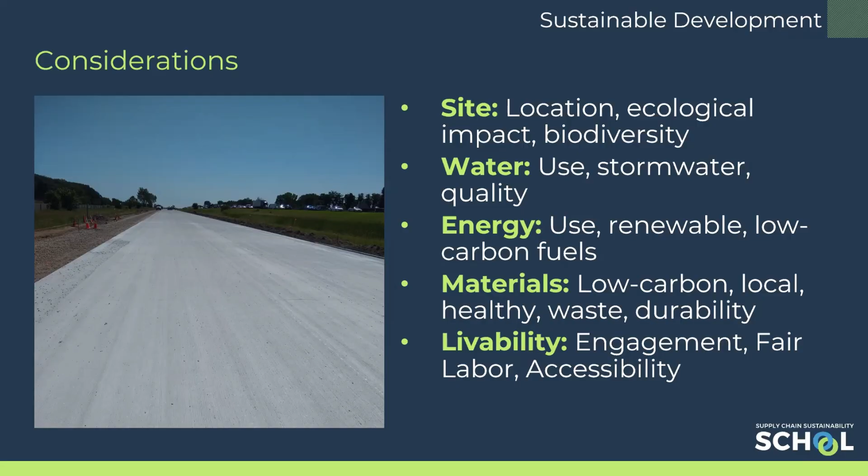So while many of the sustainable infrastructure considerations are variable by project site, this is very site specific. The one core element that's not is materials. So when we think of roads, we think of asphalt, concrete, steel, maybe shaped rocks and aggregates. And this webinar is going to focus on those material choices because of their large environmental impact. Next slide.

So you've probably seen this before, that the built environment is responsible for 39% of global energy use and carbon emissions. A subset of that 39% of global emissions is the 11%, which is from the development of construction materials and products. And when we look at infrastructure-related materials, that's primarily concrete, steel, and asphalt, that accounts for 8% of global emissions. So it's a pretty large percentage associated with these three materials.

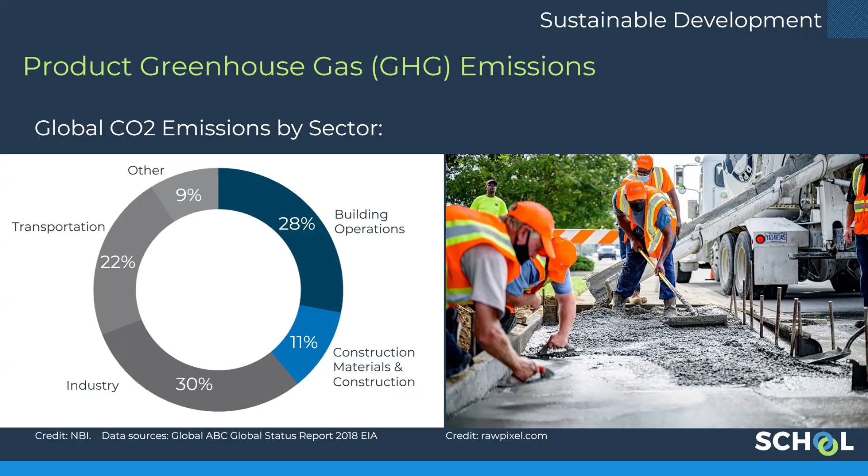The building sector has really been focused on reducing energy consumption during the operations phase, so their energy use. And there's been more focus on low embodied carbon product choices to reduce their full life cycle emissions. And now state departments of transportation are also developing policies and programs that are considering the materials in roads and bridge projects to reduce their GHG emissions associated with procurement as well. Next slide.

So there may be repair or maintenance during the use phase. So think filling potholes, for example. At the product end of life, there may be an effort to remove and transport the product to dispose or recycle it, like recycled pavement. Next slide.

Low carbon infrastructure policies and programs are being developed by public entities to meet their greenhouse gas reduction goals. And we're also seeing some private organizations develop requirements to meet corporate net zero goals. So all of these different groups are seeking qualified professionals who can deliver low carbon products and projects. Next slide.

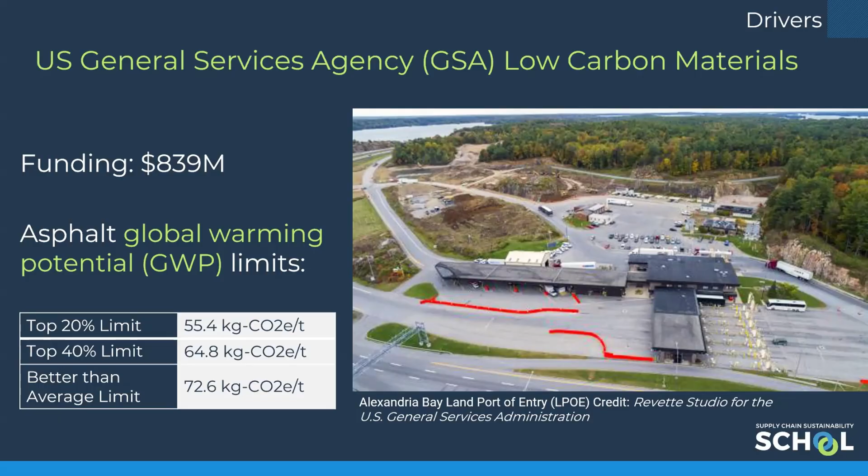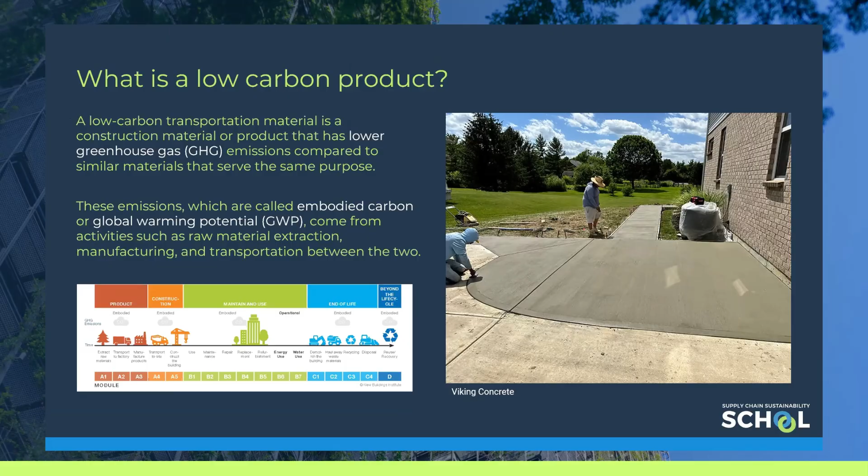So how do we deliver low carbon products and comply with these different policies and programs? Let's just jump right in. Next slide. First, we need to know what low carbon actually means. Low carbon is kind of relative to each product, and in some cases, it can change by location. So when we consider our life cycle stages, that chart on the bottom left, we also want to consider what stage. Are we looking at an individual concrete mix? Or are we looking at a full new bridge or tunnel project? In general, one batch of concrete is considered low carbon when its carbon content is 20% lower than a regional average. But that's really dependent on how a program defines it. It can be defined in a lot of different ways. Next slide.

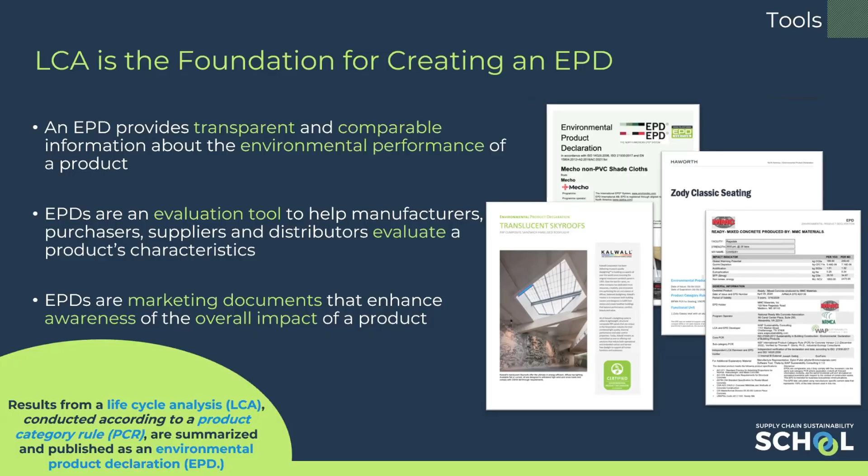We measure the embodied carbon or the global warming potential, interchangeable, of products through something called a life cycle analysis. The life cycle analysis is the foundation for creating the environmental product declaration, the EPD, that specific tool that we're using for compliance. And since the details in the EPD are specific to a product, the product manufacturer is the one that's developing that document, and they're available from some databases or obtained directly from the manufacturer. There's standards and rules around the development of LCAs and EPDs. And of course, again, the Supply Chain School has your back there. They have a webinar on this topic for more information. Next slide.

So the LCA provides some proprietary information about the product, where the EPD is kind of that public-facing document that presents the data consistently, and the data can be compared within the same product class. So if you're looking at asphalt, you can compare it to asphalt, but you don't necessarily want to compare asphalt and concrete since they're different types of products. Next slide.

EPDs also provide information about the environmental attributes of a product. It's more than just the global warming potential. So most of these DOT programs are asking for the global warming potential of a product. But there's a lot more information in the LCA and the EPD, like the ozone depletion potential, the water use, acidification, eutrophication. The LCAs provide product manufacturers really helpful information to improve the overall environmental performance of their products. So while we're just looking at one thing, just know that these are really complex and have a variety of data in them. Next slide.

Low carbon material programs often focus on the most commonly used products and those that are relatively higher in embodied carbon and have lower carbon alternates. So in transportation, go to the next slide, we're looking at concrete, asphalt, and steel. We'll look at each of these products and understand kind of high-level opportunities to reduce the global warming potential of each of the products. Next slide.

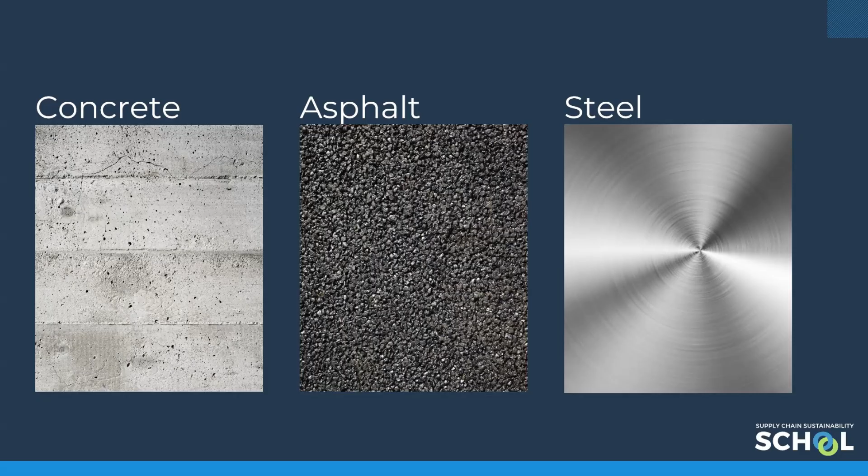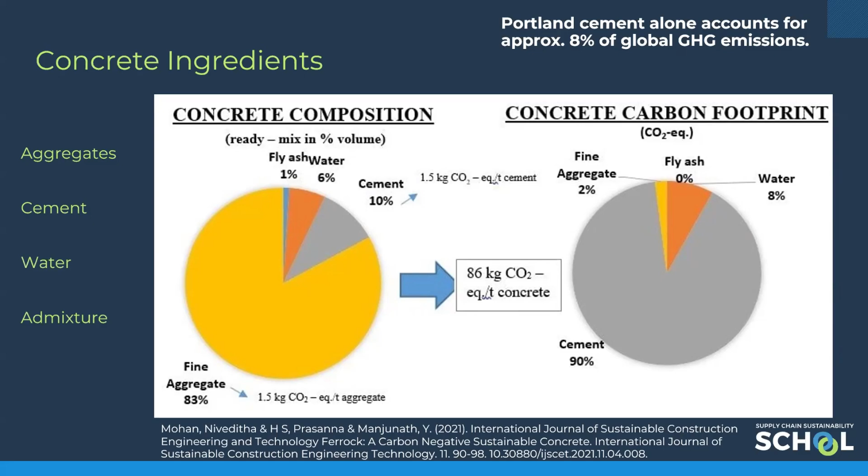So first we have concrete. What's concrete made of? It's a really simple and very complex product. Concrete consists mainly of aggregates by volume, but also contains cement and/or supplementary cementitious materials, water, and admixtures. The pie chart on the right shows that the majority of the concrete emissions comes from cement production alone, specifically the clinker manufacturing. It's around 90 to 95% of the product's global warming potential. And the clinker is produced by heating limestone, which is a rock, to really extreme temperatures, cooling it down, and then crushing it. So it's a very energy intensive process. So when we talk about reducing emissions from concrete, it's often finding ways to reduce the cement content while meeting the same performance characteristics. Next slide.

And aggregates, which are 80% of the concrete by volume, come from different types of rock quarries, but not all rock is the same. It's a very heavy product, so you're likely using something that's more local. And if the aggregate's of lower quality, your local concrete might require more cement to reach specific strength requirements, or maybe you're actually importing higher quality aggregate so that you have stronger aggregate and could use less cement. The more the product needs to travel, the more likely you're increasing the energy to make that product. Next slide.

So there's several opportunities to reduce the emissions associated with creating concrete. It's a really flexible and unique product in that each mix can be different. But because cement dominates the concrete emissions, most decarbonization efforts are focusing on reducing the cement and clinker content with supplementary cementitious materials, or lowering the emissions from cement manufacturing through plant energy efficiency or lower carbon fuels. And some of those efforts take years or decades to move those plant efficiencies forward.

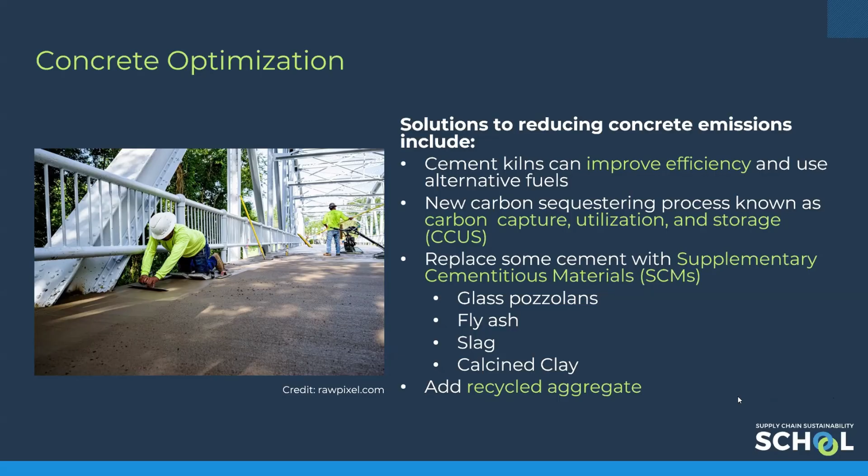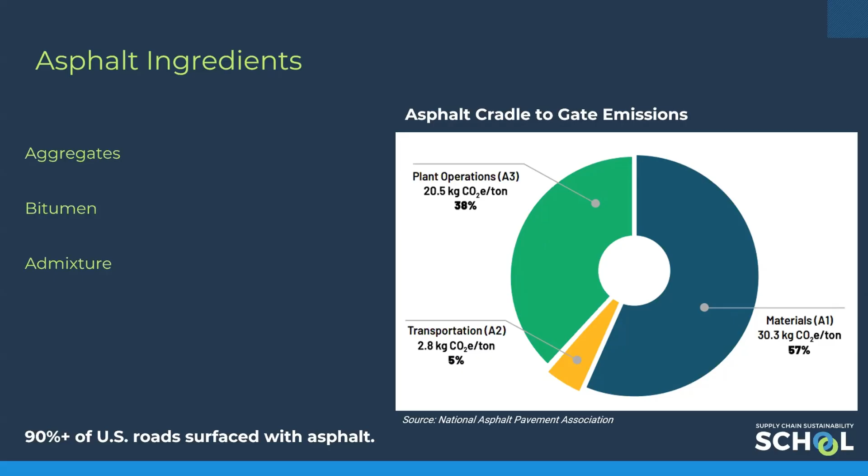Next, we have asphalt. Asphalt, similar to concrete, we're looking at 90 to 95% crushed stone, sand, and aggregate by volume. And then we have bitumen, which is a byproduct of crude oil refining, and it's really the glue that holds all the rocks together. In many cases, the extraction, transportation, and manufacturing of the raw materials accounts for about 50% of the asphalt emissions. And the asphalt plant itself, that burner fuel, is about 40% of the emissions. So where with concrete all of the emissions were pretty much in the products themselves, with asphalt, the actual heating of the fuel is where we're seeing more emissions. Next slide.

So there's several options to reduce the embodied carbon of asphalt. Increasing the amount of recycled asphalt pavement is number one. So if asphalt mixtures were to include 1% more reclaimed asphalt pavement, it would be the equivalent of taking 30,000 cars off the road. So just 1% makes a big difference. Asphalt plant fuel is the second largest carbon impact in asphalt. So reducing the asphalt mixture temperature will reduce the amount of fuel that we're using. And many departments of transportation are experimenting with warm mix asphalt over hot mix asphalt.

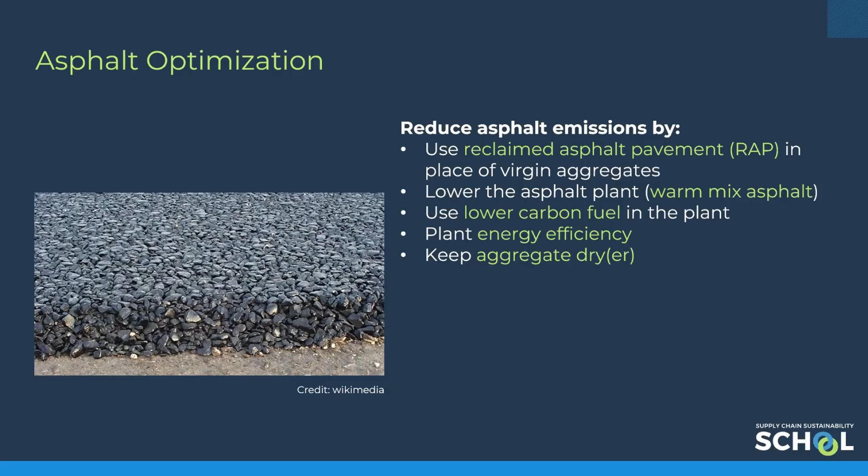So steel is our last one. Steel is 98% iron. It's also one of the most mined materials in the world by volume, but it's also a highly recycled product. Steel is made with either blast and basic oxygen furnaces or electric arc furnaces. Basic oxygen furnaces really depend on more virgin materials and are more energy intensive than the steel that comes from electric arc furnaces. And in the US, 70% of steel is produced with electric arc furnaces, which use significantly less energy and more recycled scrap steel.

So steel covers a lot of categories when we're looking at low carbon transportation materials. It can include structural steel shapes, welded wire mesh, plate, rebar, and a lot more. So it's not just the big heavy steel. Next slide.

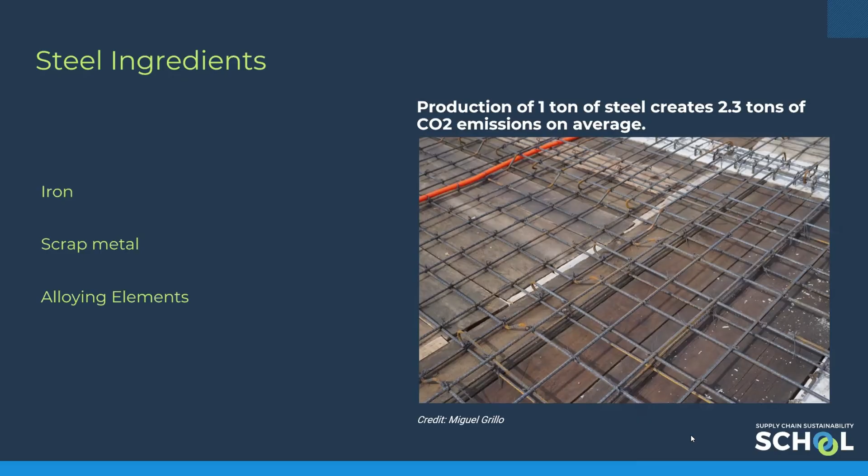Steel is considered a globally traded commodity compared to concrete and asphalt, which are much more local. China produces over 50% of the world's steel, and the US produces about 5% of the world's steel. But steel demand is closely linked to economic growth. And steel travels around the globe in nearly every sort of transportation that you can imagine, from ships to train cars to across roads to reach every corner of the globe. Next slide.

Steel with higher recycled content often has a lower carbon profile, like rebar. Rebar is often 99% recycled content. As you mentioned before, the electric arc furnaces use less energy than basic oxygen furnaces, and we can improve the energy efficiency in steel mills, and we can reduce the emissions by about 10 to 20%. Again, changing these steel mills is a long capital improvement project, so it takes a long time.

Lower carbon fuel is a key to achieving net zero steel, either through lower carbon electricity or hydrogen-based fuels, which has limited adoption. Carbon neutral steel does exist, but good luck getting your hands on it. European automakers have really kind of purchased it before it even hits the market.

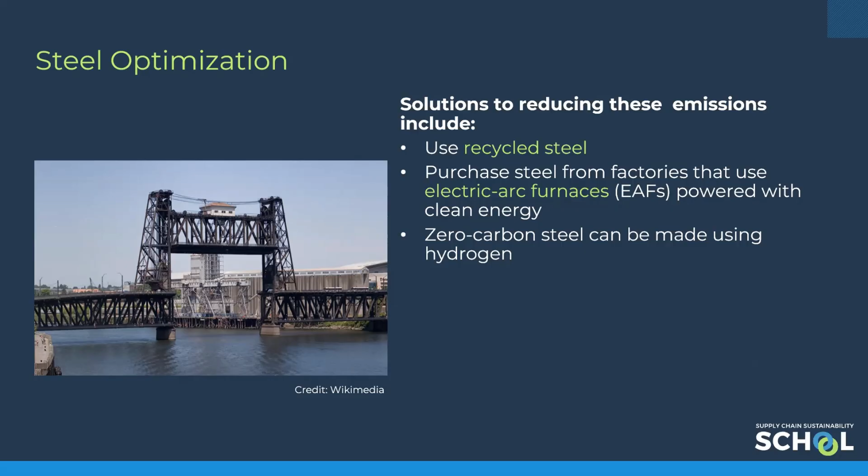So similar to concrete, steel design can be optimized to reduce the overall project embodied carbon emissions. So we can change the shape or kind of change the spacing of the amount of steel that we're using on the project. Next slide.

So how do we deliver these lower carbon products? We know that there's programs that are very local, and they likely include environmental product declarations. If there's a buy clean or low carbon transportation materials policy in your region, I encourage you to engage with those who are developing the program. They're often seeking input because they know that they need your insights to be successful.

So engage with your local departments of transportation, learn more about your local programs, take advantage of the free education. Regional and national industry associations like the National Ready Mix Concrete Association, National Asphalt Pavement Association, and the American Institute of Steel Construction have webinars on lower carbon products that go into a lot more detail. This knowledge can really help give you a competitive advantage on other projects, not just transportation related projects.

And finally, communicate with your teams, suppliers, and project owners. The more you can share your issues, your lessons learned, your tips and tricks, really anything, it's very helpful for others to know. You can create case studies, and chances are that other people have similar questions. And as a first mover in this space, you can become an industry leader. Next slide.

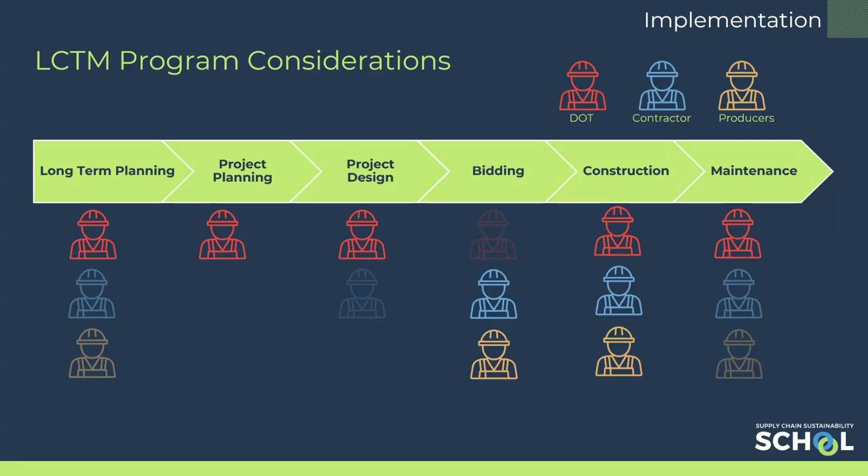Post-construction is where we see the results with lower carbon materials performing. And honestly, lower carbon concrete looks and performs just as high carbon concrete, but we know that we're improving our air, land, and water. Next slide.

Within the construction stage, it's primarily the contractor who is determining the on-site energy sources during installation. But the DOT could have specifications that require that trucks don't idle, or specific equipment is electric, and as I mentioned before, using a warm over hot mix asphalt specifically.

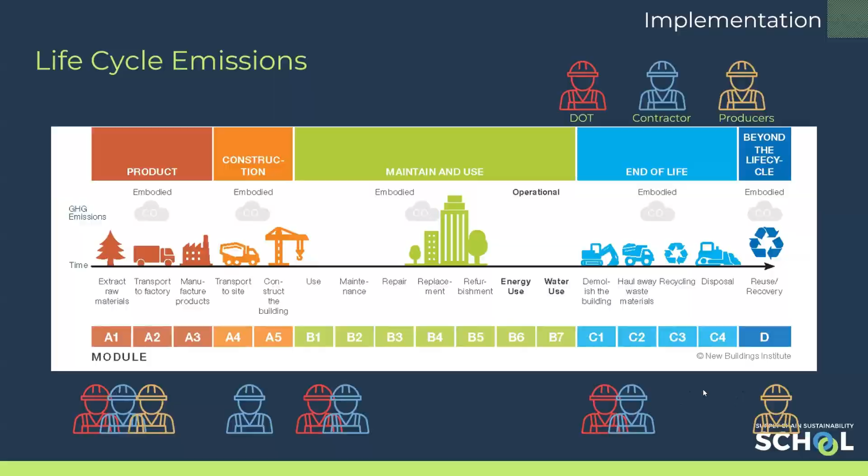So we learned that there's still demand for lower carbon concrete, asphalt, and steel, with states that are leading the effort through legislative actions and DOT programs. Environmental product declarations, EPDs, are really that proof of delivery for lower carbon products.

And we learned that there are several strategies for lower carbon concrete, asphalt, and steel. That's from plant efficiency for all these products to replacing the higher carbon ingredients with the lower carbon options. And those products can still perform the same. Lower carbon product related programs really benefit from collaborations with state agencies, contractors, product producers, and industry associations.

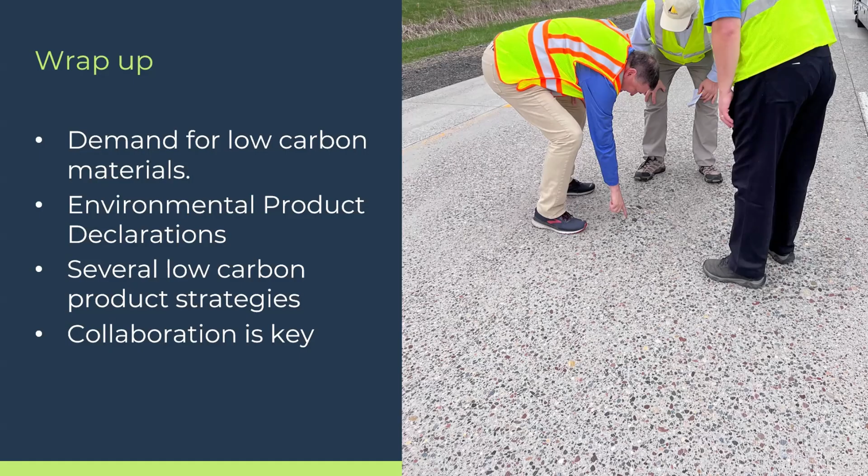So we hope that you continue the conversation and engage in local discussions on sustainable development, like these guys on the right that are checking out this low carbon concrete and trying to point out what's different. Next slide.